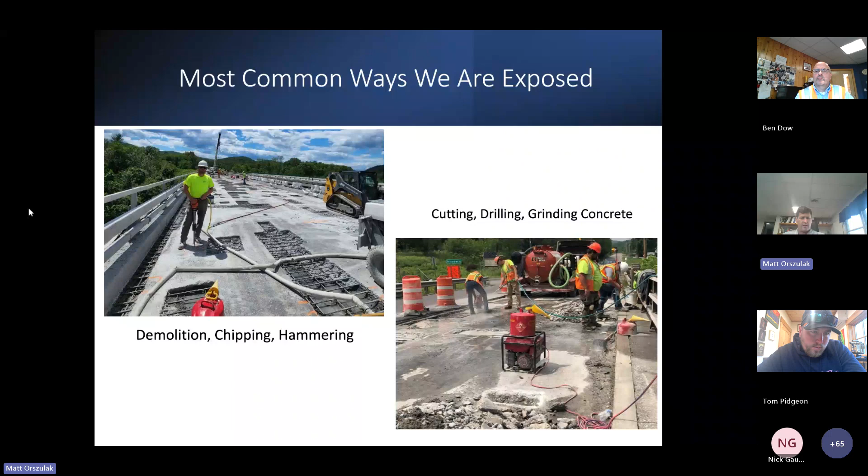Most common ways, again: demolition, chipping, hammering, cutting, drilling, grinding concrete. A lot of these bridge deck projects we've been doing and tackling. But also as simple as taking out a sidewalk for a water break, it pops up to us all the time. So we have a lot of different tools available in our toolbox, hopefully this is just a refresher for everybody. The PEL, the exposure limit, OSHA standard kicks in if our workers are exposed for over 50 micrograms per meter cubed of air, averaging over an 8-hour day.

So how the standard is written, they actually tell us common practices and how to handle those common practices, and we're going to talk about that in a future slide. But for the most part, this next slide shows how it's not a lot of silica in the air that triggers the standard. I mean, it's really nothing at all.

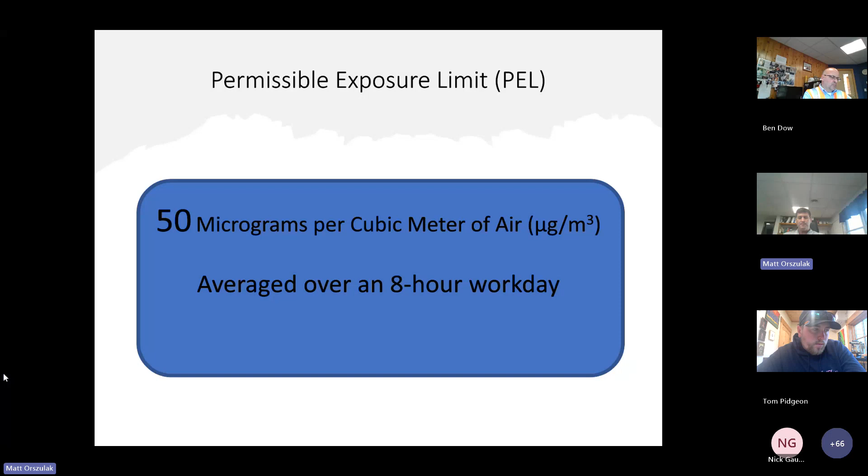Here's an example: there's a dime. You can see this dime in this art, like this little arch here, the dime, and you have all these little white specks. This is the amount of these little white specks in a room 7 feet tall by 10 by 10. That's all you get. So really, anytime we get a target saw going or start chipping in concrete, we need to follow the standards.

That's why it's on our JHAs for someone to identify if we're going to be doing this type of work, we need to make sure we have some type of controls in place. We're thinking of the hierarchy of controls: how we're going to eliminate, how we're going to substitute, how we're going to utilize isolation or administrative controls, which is the point of this training, to make sure that we're A, meeting the standard, but B, protecting our workers from the crystalline silica potential exposure.

It's nothing that's going to hit you right away, that's why it's easy to not really care about it, because it's not today or tomorrow. It's 10, 15, 20 years down the road of overexposing yourself.

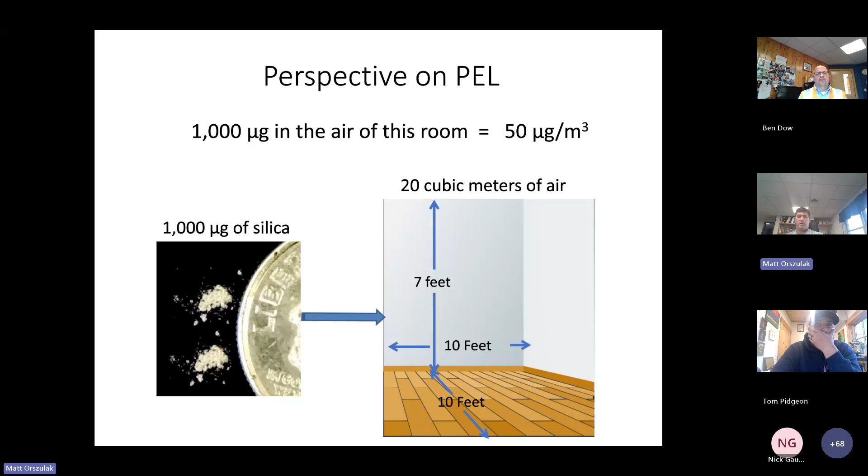So OSHA, I spelled OSHA wrong on this one, gotta fix that. It has a table, kind of a best practice in our manual. When we have to submit silica plans for projects, it's just saying that we're going to follow table 1.

So if anyone gets asked by a compliance officer, hey, what's your silica exposure plan? It's following table 1. The standard has been one of the most cited standards in Vermont over the last maybe 3 years, because workers kind of fail to determine that there is not a plan in place.

Our plan is following table 1, and it's written right in our JHAs. So when you identify that there's silica exposure, you hit that tab, and then you're following our best practices depending on the task that you're doing at hand.

So jackhammering, it's all here. We're trying to use water as best we can. There's also vac. Again, with all this dust, it's either wet or vac, everything that we're doing. We've got a couple of Hilti vacs.

The technology on this stuff is continuously being improved. It's not perfect, but it's continuously getting better, and we're always looking for better tools out there to make sure that we can really keep the dust down when we're doing some of this demolition work.

Again, when we're utilizing this part of the standard, it really triggers the respiratory protection side of another standard in OSHA. So again, we got to also make sure we're following that kind of 4-hour interval.

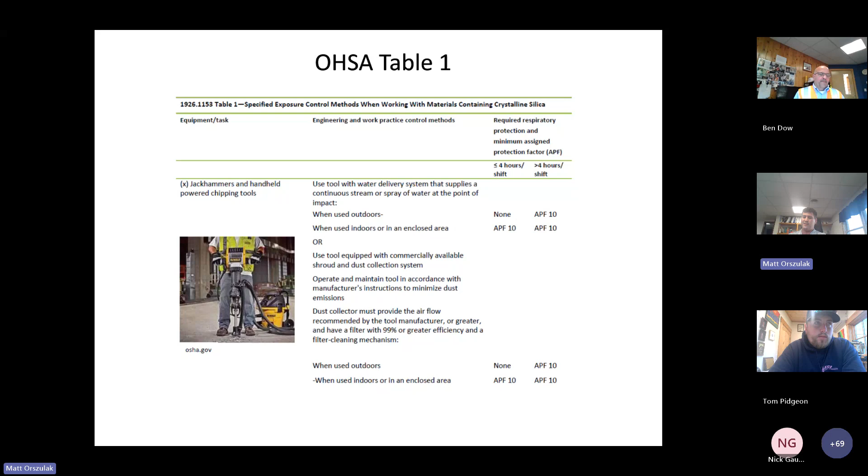So that's kind of that trigger point, how long that exposure is going to be when we're doing those types of tasks. The table 1 and our JHA has drop downs that meet this table 1 identically. Handheld power saws, any blade, as long as you're using water, integrated water system, no dust mask needed. And if it's over the 4 hours, or if it's inside, then we need to start using APF of 10, which is just a dust mask.

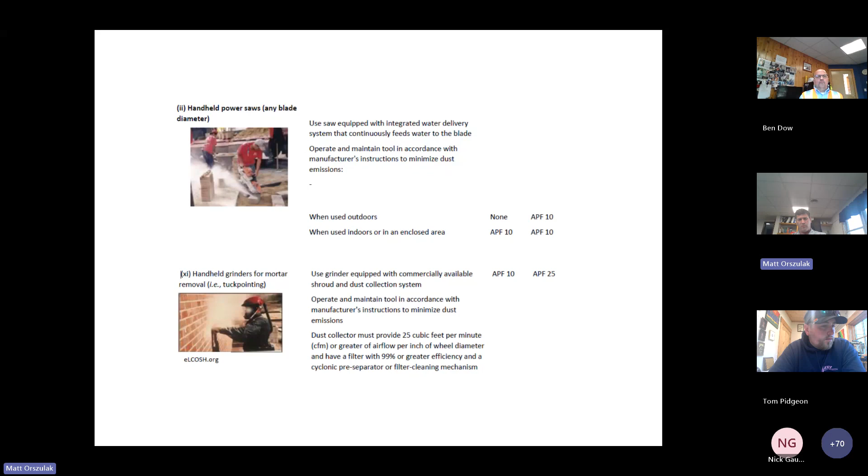Handheld grinders, mortar removal tools, same thing. We don't really do a lot of that type of work, nip work, stuff like that. So the assigned protection factor, or APF, here's an example of our respiratory kind of protection.

Again, we want to try to utilize the hierarchy of control, so we're not having just to rely on PPE to keep us safe, utilizing those dustless technology, water integrated systems, so we don't have to get into the kind of the PAPR or half face, full face respirators, dust masks.

Because I'm sure a lot of individuals on this call know that it's a nuisance. It's harder to work, especially in these hot days like we've been having with these high humidity days. It's just an added stress to your body trying to breathe through a filter to get the oxygen that you need to maintain a good productive pace.

So those are here. If any questions on that, reach out to Tom and myself, and we'll help you make sure we have the right respirator for the job, if we need to wear respirators, to make sure that we're not overexposing ourselves with any silica.

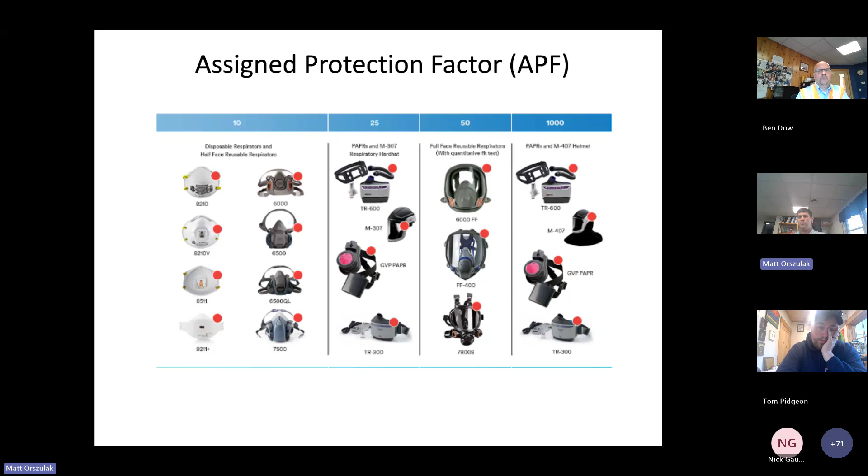So health effects is silicosis, lung cancer. That's what happens. It creates scar tissue in your lungs over prolonged breathing exposure for a very long time, and then you get kidney disease.

What's this one, Tom? Chronic obstructive pulmonary disease. So again, yes, it's the same as what you get from smoking cigarettes. Yeah, very similar from what I understand too.

Again, those are the things that we do, that we are exposed to with the occupation that we chose to get into. So we need to make sure that we identify, and then we set up with that best practice, how we're going to work safe around that potential exposure. It's something that we can't take lightly. We got to take it serious and put the right thought into it so everybody can go home safe and sound each and every day.

Anything to add, Tom?

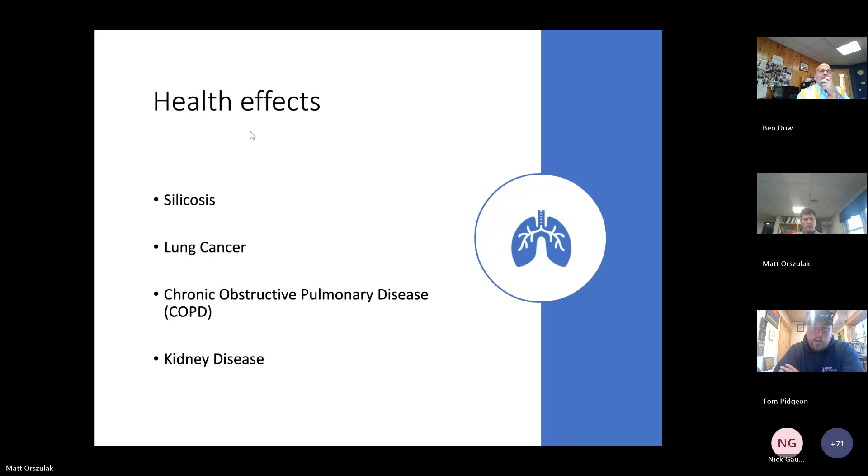No, the big thing is after one day of doing this, you're not going to feel any different. So it's really easy to get complacent around this stuff. But after years and years of doing it, there are plenty of people around ECI that'll tell you why you need to wear a respirator when you do that sort of work. Best practice: keep it wet, use a dust system.

Integrated dust system. You guys remember Stu King? He was our safety director before Matt. He came to our job one time and was giving us a hard time about trying to get us compliant with our dust mask. And it was hard, it was hot. And he said, you ever see the filter on a shop vac after we're doing some of these operations?

I said, well, there's one in the back of the truck. So he pulled it out and pulled the bag out, and he said, this is what your lungs are doing. They're taking all this stuff in. I always remember when he did that because I never really thought of it that way, but all those very fine particles, we're breathing them in and they can't get back out again. So they're kind of embedding themselves into your tissues, which is kind of scary when you look at it that way.

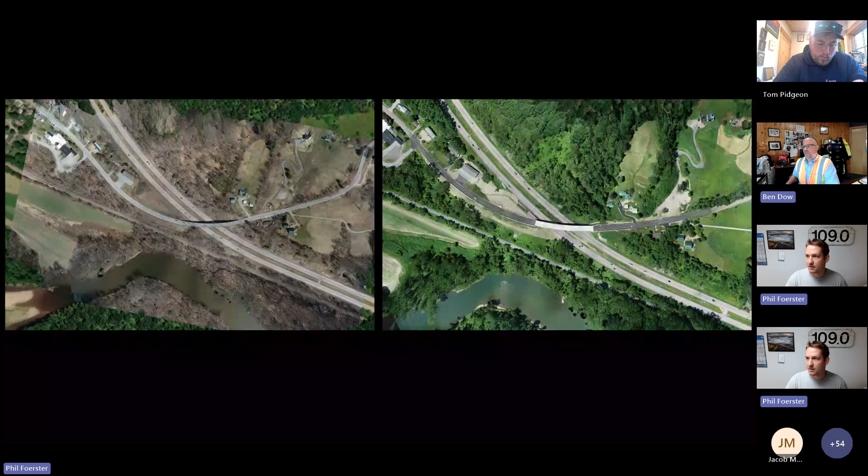I'll share, it'll be easier for you. So this is our third look at this project. It's virtually complete - I know Phil's got a couple of things he's going to talk about that he's got to go back and the guys have to do, but this is a very high profile job, in that most everyone around here has seen it. Good job, Phil, and all of your guys on that job, putting your equipment out there so that people knew it was us. I'll turn it over to you.

Thanks, Ben. This is our last and final installment, I think it's our third or our fourth, maybe. I'm sure we've touched on a few things, but here we go. So we were contracted to replace the bridge over Route 2, the bridge over the interstate, and we're nearing completion. This is our drone shot, before and after. You can see the bridge and then its new alignment - you can see the curve, the way the curve has changed. Yeah, the new bridge is on the inside now, and the old bridge has been completely removed and the road restored, so no evidence that it was ever over there, aside from maybe some weird odd grades.

Wow. So we still had some things to do this year, although last year was very successful. At the start of the project we installed 2 culverts. Oh, that didn't work, hold on, sorry. At the start of the year, we installed 2 culverts that were installed using a phased approach to accommodate the traffic control restrictions on Route 2 and the challenges presented by their burial depth.

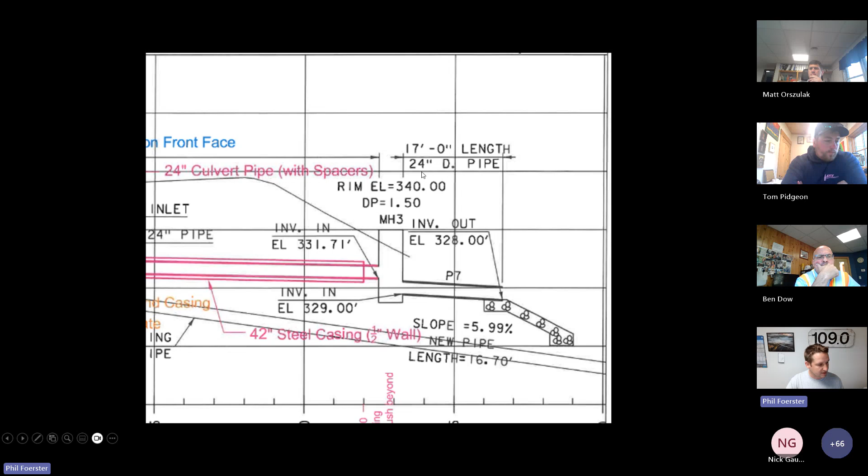Culvert 6 was a 24-inch HDPE pipe that was partially installed in 2023 using an auger bore method inside a 42-inch steel casing, and we stopped just short of a manhole that was going to be going in the future. The bold line here, that's the new embankment of the road. This is not something you could install after, so we had to install it before. A test ball was used to seal the end of the culvert, allowing the annular space to be filled with foam concrete, as discussed in our original presentation. With traffic now in its final configuration, the buried end of the culvert was carefully uncovered and the test ball was removed.

So we used foam concrete, it's very light. Once that storm structure and that pipe had been collecting water for 2 years, once we pulled that test ball out, it was quite a deluge of water. The neat thing with foamed concrete is it can be lighter than water depending on how it's mixed. So some of the chunks, depending on where they were in their expanding process, were lighter than water and were actually floating on top, as you can see here. So once that test ball was removed, water came flying out of there, the hole filled up with water, and concrete was floating around, but we knew we'd found it.

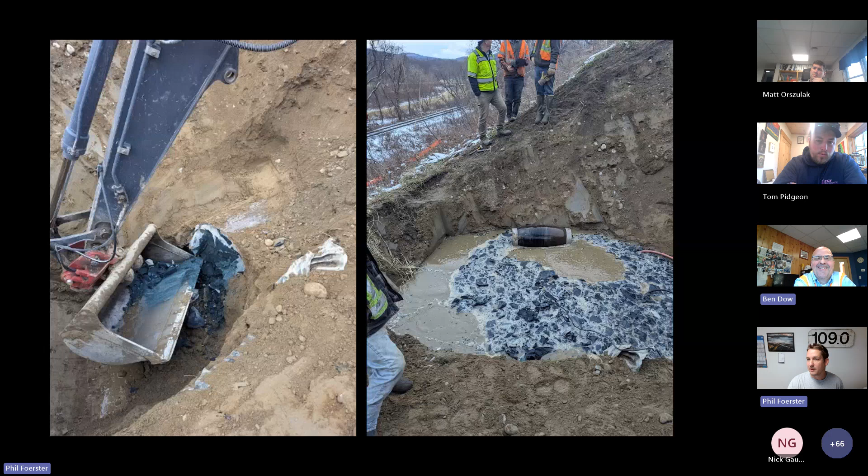This method proved highly effective, and a new structure was quickly set, and the pipe run was complete. We exposed the end of that pipe, cleaned out the inside, and were able to make that connection. Here the guys are installing, finishing the short stint into the manhole. We got the manhole set.

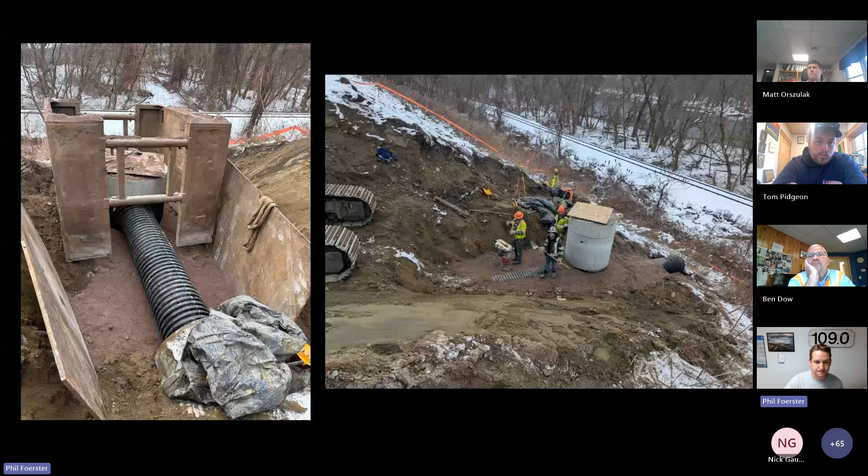The final drainage structure to be completed was also first installed in 2023. It was a 48-inch CMP culvert set at a 12% slope.

During phase 1, sheet piles were used to support old Route 2. In phase 2, these same sheets, along with a few extras, were used to support the new road and the embankment. Traffic was on this side, and then we built up this embankment later on. Traffic was over here, and we excavated on the other side of the sheet. So you can see the guys taking care of that there.

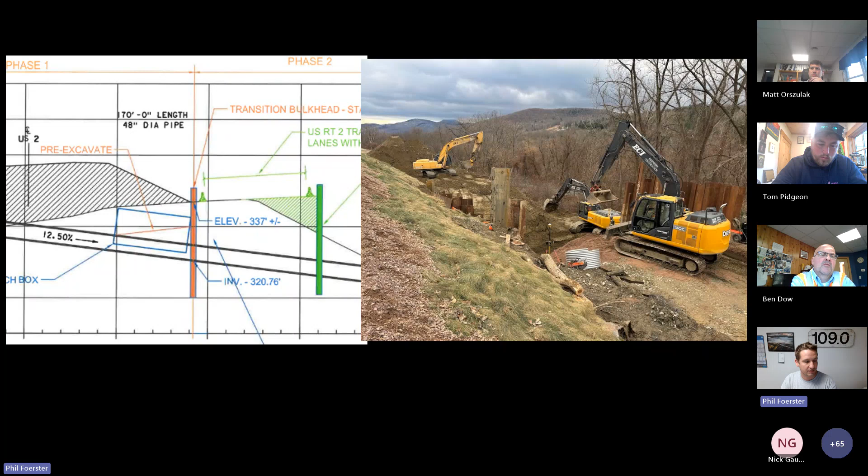Definitely something we'd never done before in Hinesburg with a box culvert, but it proved to be fairly effective. We got lucky. We hit the joint right perfectly from the old and the new pipe there.

This snippet from ECI's plans highlights the advantages we bring as a company through our ability to design and develop constructible plans entirely in-house. You can see here, this was something we came up with, and on the right is a picture, exactly as the way we drew it up. It's something that, when designers who have never done construction sometimes draw something, it is just generally not constructible.

And we deal with that a lot across the company. So this was a nice example of, if you know what you're doing, it tends to be a little easier to build and draw. Nice job there from everyone involved on our team.

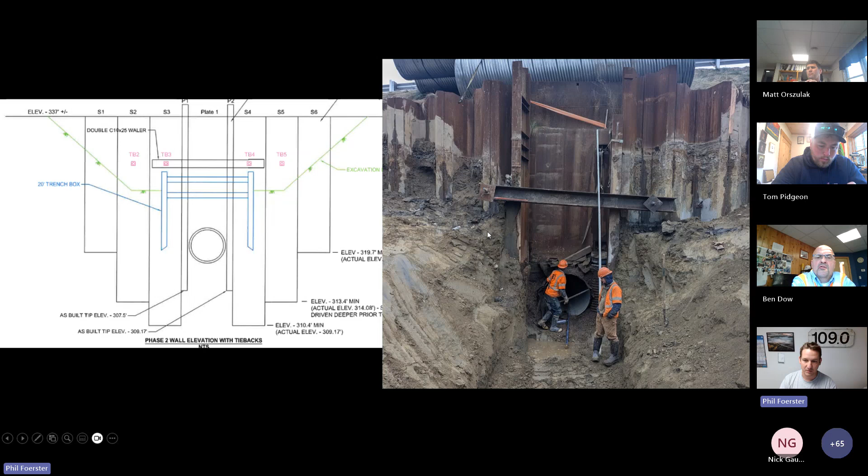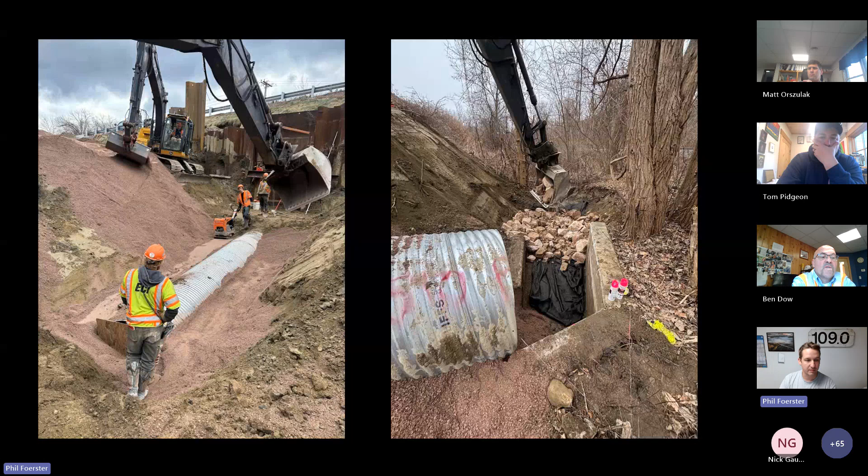There, the pipe run is being completed, and we actually tied into an existing outlet structure that we didn't know was there, but it allowed the water to be diverted away from the base of the tree and over towards the railroad culverts outside the right of way.

Over the winter, the crew removed the sheet pile wall that enabled the 12-foot alignment shift of old Route 2.

These crews worked in close coordination to keep progress on track, as well as gradually remove the wall. As the wall gradually was removed, access was restricted, and so the restoration and reshaping had to kind of happen at the same time. It was a lot of big equipment in a very tight space.

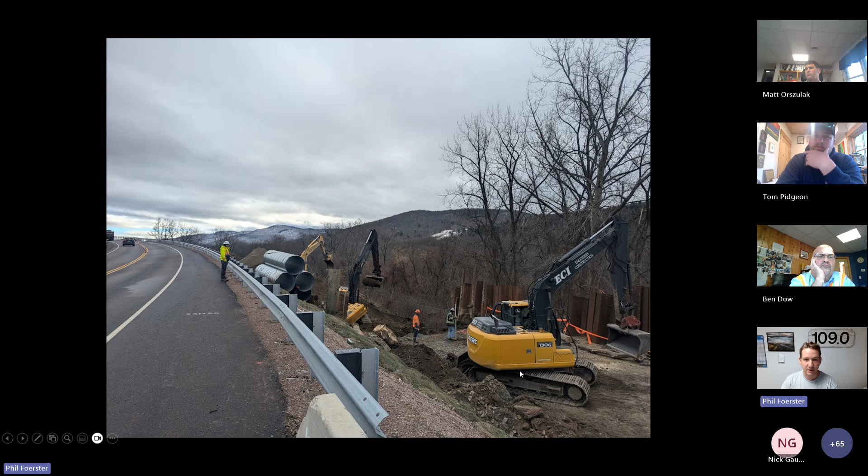The staggered approach worked fairly well. Here the guys are pulling some sheets.

Once all signs of old Route 2 were gone, the crew demobilized for the winter. This is kind of how we left it at the end of last year.

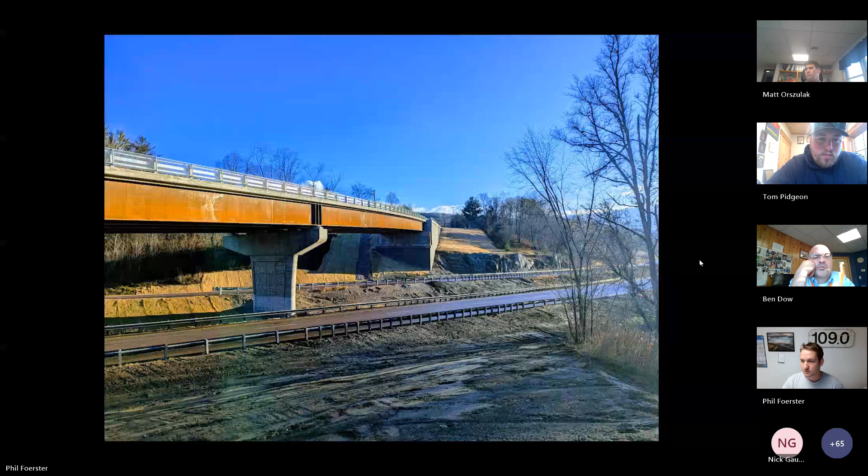In the spring, the team remobilized to complete several of the remaining tasks, installing miscellaneous steel components underneath the bridge, using one of our bucket trucks.

Removing interstate crossovers also happened this spring, and the guys reinstalled the rumble strips along 89. We used our hydro seeder to restore that median area, which now you can't even tell that those crossovers were there.

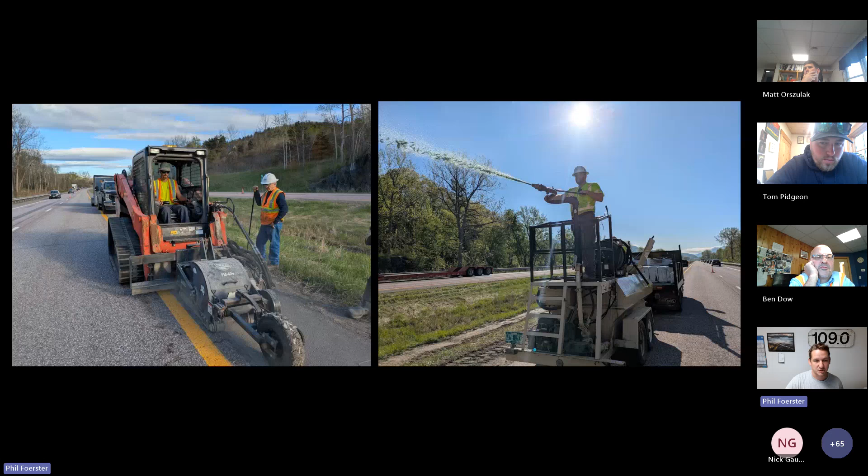The state was really happy with how that came out, and this was fairly critical from a permitting aspect. Had to both pass a shovel test and a few other requirements.

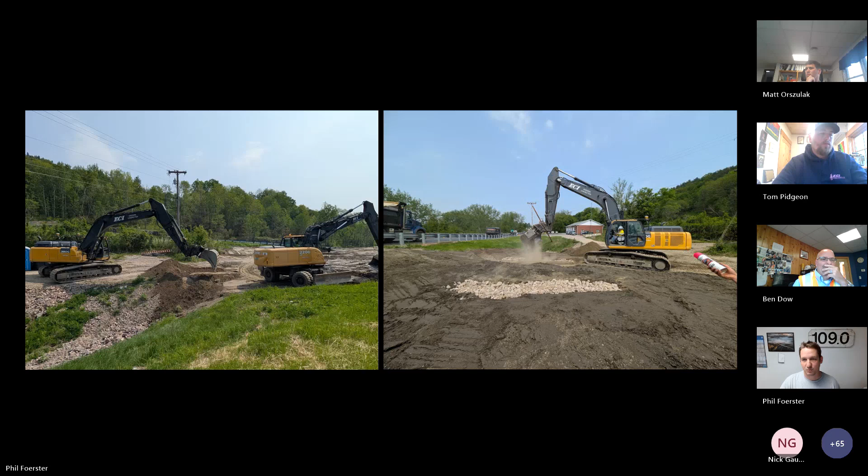And then we placed the final wearing course and completed the line striping. Here's the paving crew getting after it. That was earlier this year. They did a really nice job. That's a nice looking mat.

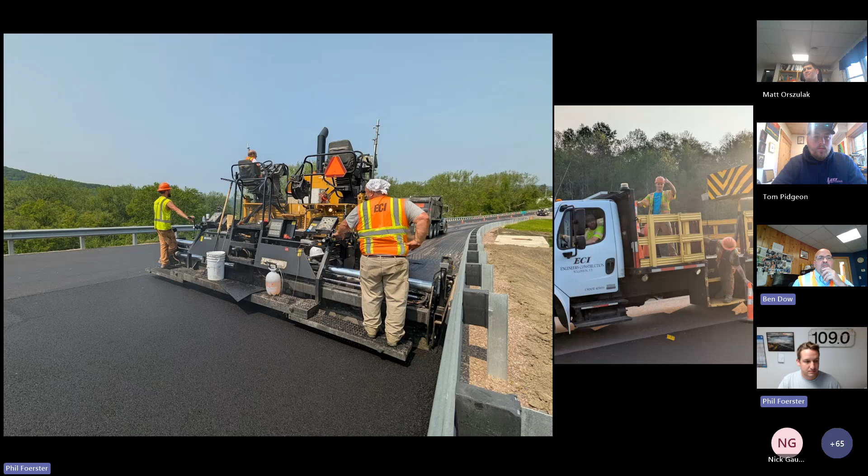The crew will remobilize one final time in a couple weeks after the Jericho shutdown to address any remaining items and close out the punch list. So the project is generally done. We're waiting for grass to grow, and we've got a few little things to pick up here and there. All in all, really good job from the team.

Good job. Thanks. I wish we could have cast ECI into that, that would have been nice. I just wanted to give a big shout out to all the over 100 people that were involved on the project. So good job to everyone. Yeah, awesome, looks like a lot of people. Looks like almost everybody, almost every, yeah, half the company, over 100 people.

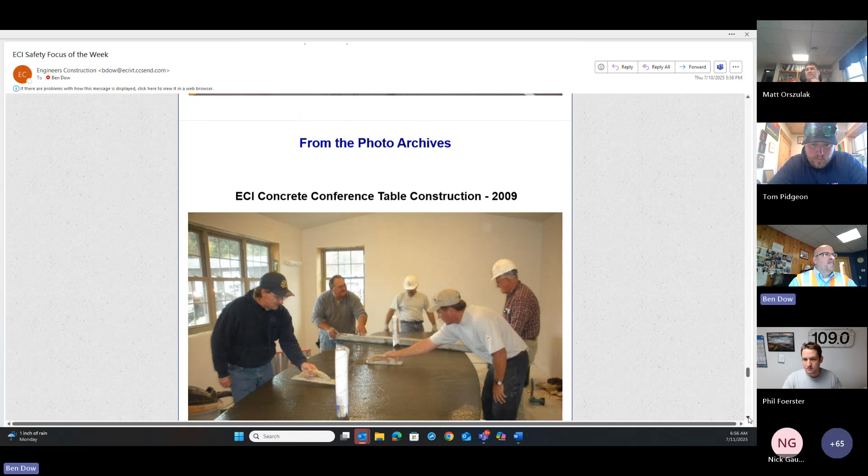I found something from 2009. Back in 2008, we removed the old tire shed and built a conference room out here. And when we got the conference room, it was kind of really long, and we wanted a table.

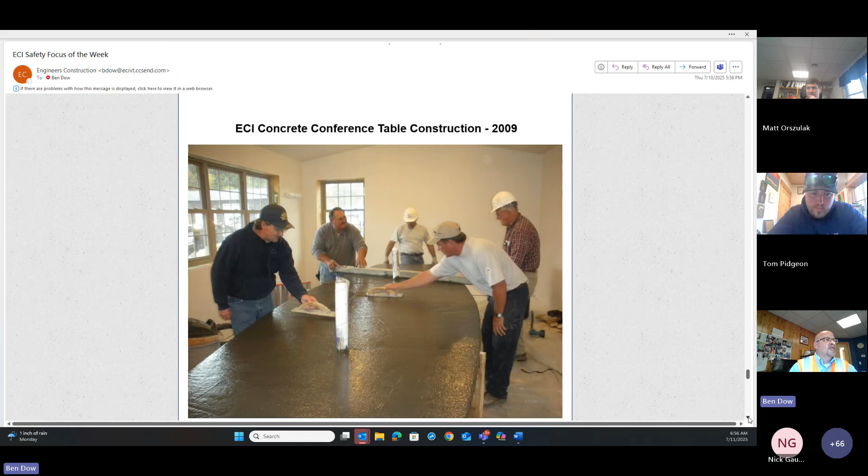Ken and I looked everywhere to try to find a table, and we couldn't find one. So we built one. The guys in the shop built a steel tray. It was actually originally a foot wider, and we cut a foot out of it because we ended up making it too wide. But Ken Pidgeon and I laid out curves on the floor from the curve tables in the back of the field book, and plotted them to make a template for the curvature of that table.

Here's a couple of Johnstons and Jack Kerr, George Shortsleeves, who's not with us anymore, pouring the concrete on the table. And I believe, Tom Pidgeon, you were here at the time, and I think you had a lot to do with mixing all our different aggregates. Do you remember that, Tom?

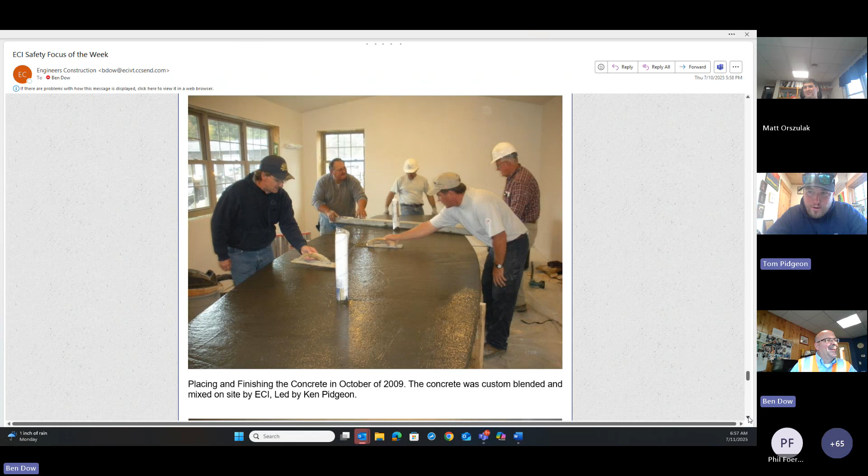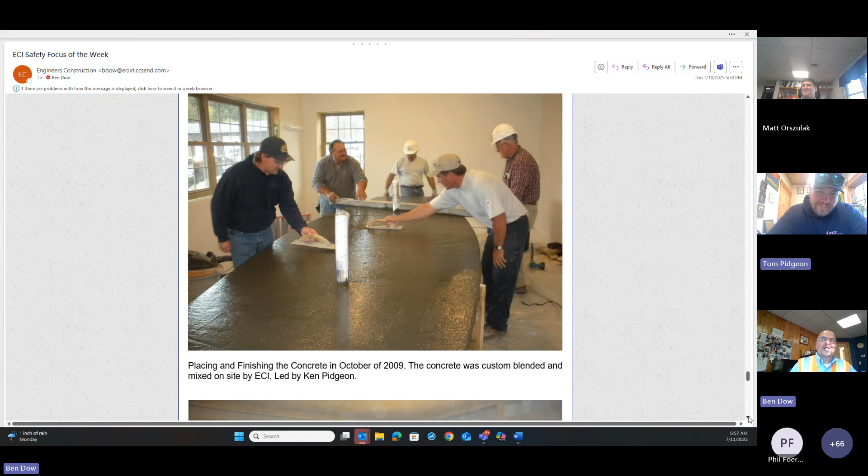Yeah, we did a lot of chemistry experiments on how to do it right, and it's still cracked. So apparently we shouldn't leave that to middle school kids to come up with our mix designs. Well, I also think we lowered the table 2 inches, and it could have cracked when we removed it after we poured it. So I'll say it could have been due to the flexing of that thing.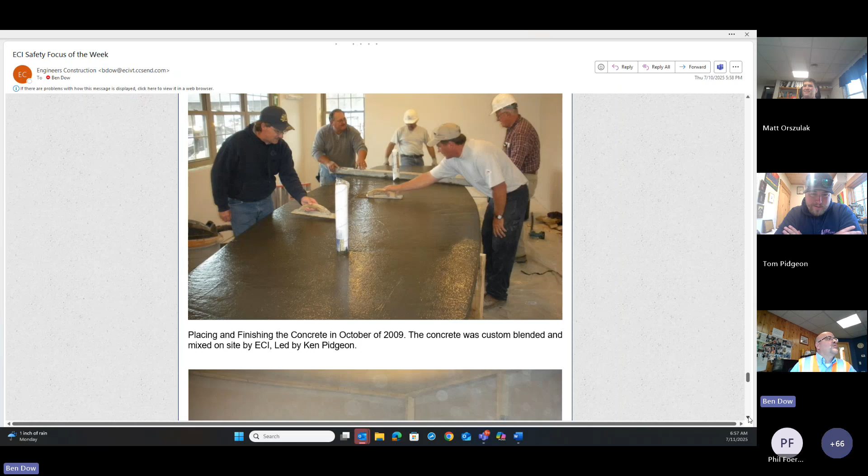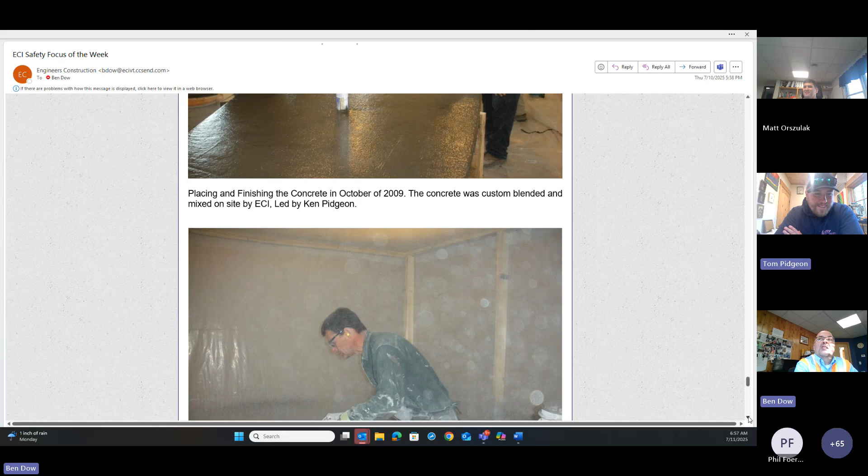But there's Ronnie right there on the left, he looks a little bit younger in this photo. Huh, Jack looks the same. Well, I guess I was a high schooler when we did it. Okay, you were. Yeah, I remember getting aggregates from Whitcomb's and SLC and different places.

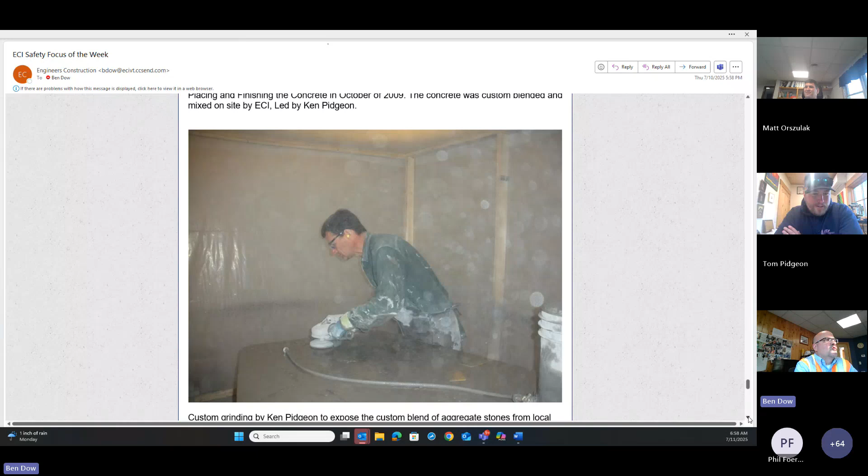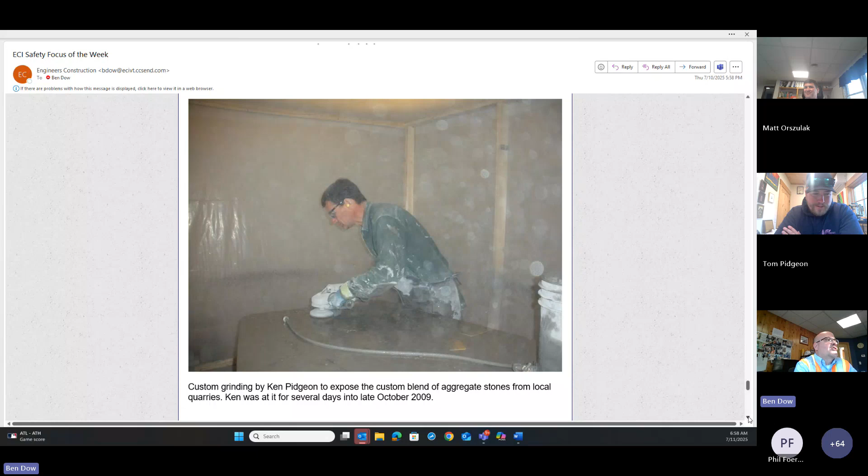So here's Ken, yeah, he was in there for days. We were trying to work, and all we could hear was the noise of this grinder because he wanted to expose the aggregate on the table. This must have been before the silica presentation. It's watered, it's wet, as you can see, we built a plastic tent in the room, and he wet ground it. If you look at all the stuff all over him.

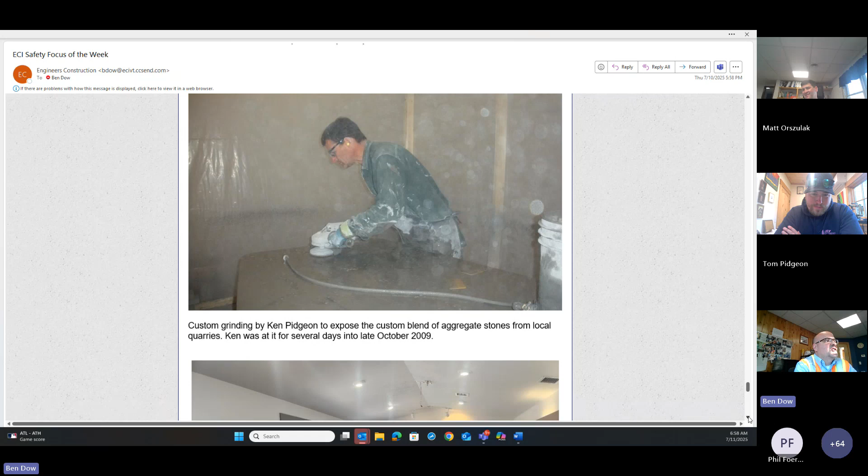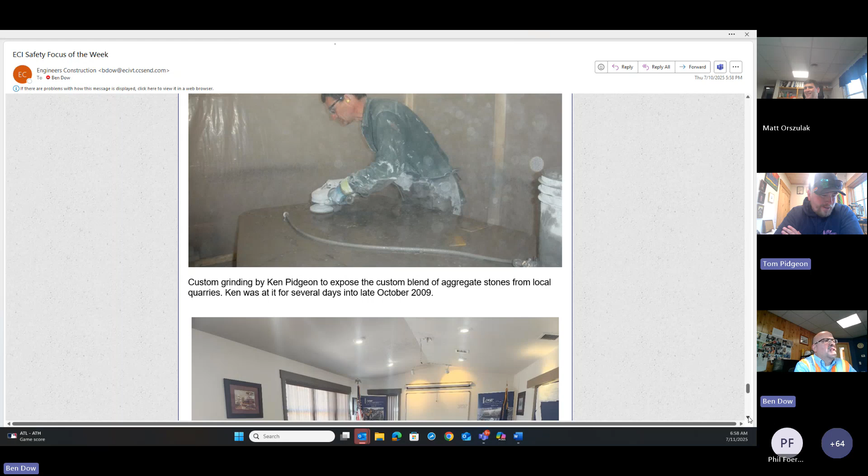But it was a mess, it was a slurry, we were vacuuming the slurry. He was in there for days. I remember he cut his hand doing it too. Yep, so that was a process, Matt, I think you were involved too, of making sure we had plenty of water so we didn't create the silica dust.

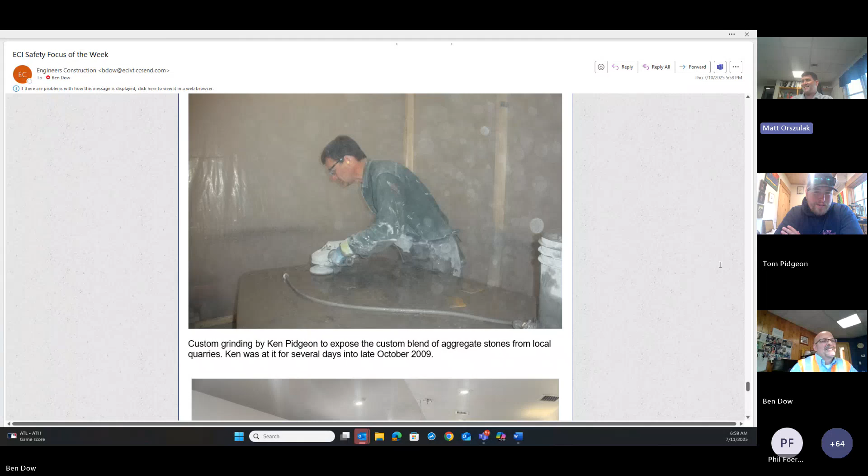I took a picture of it last night just as it sits. It still looks good, I can see the SLC stone, I see the reds, the Whitcomb's quarry. And that table still looks pretty good. I wiped it down a little bit last night.

But that just illustrates what we do here, a lot of times if we can't find the right thing, like Phil said, people put their heads together and we in-house designed and built our own conference table, which is kind of cool. Hopefully Ken was proud of it, that he really took hold of that project, and he was relentless with that process. So that's all I've got.